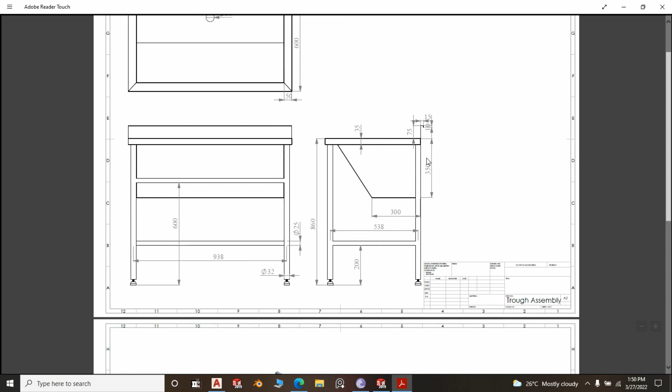You can even go ahead and use it in your fabrication, though it might be a bit challenging because I didn't put the cutting size of the trough body, but I'm sure if you are quite experienced in fabrication, you can get your cutting sizes from this, right?

So the size of the trough sink is 1 meter by 600, 1 meter by 600, and as you can see, the upper bend, the bend from here, this side is 50 millimeter.

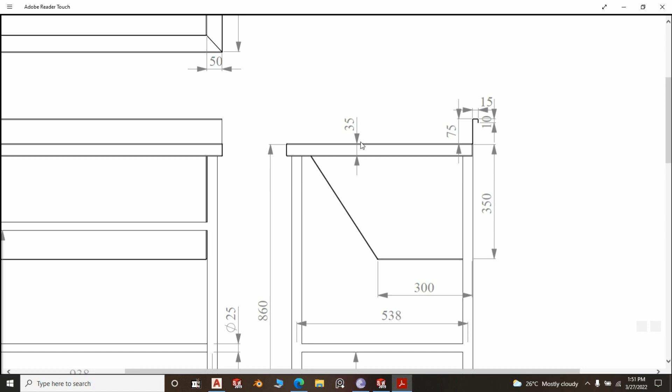Right behind here, can we zoom it slightly? It has an upstand of 75 millimeter, a bend going to the wall of 15 millimeter, and another one going down at 10 millimeter. The trough has a depth of 350 millimeter and 300 at the base, so that you may have it inclined. The reason why it is inclined, once again, is when you're standing and washing here, you don't splash water onto yourself and it goes straight to the drain.

The drain hole is dia 50, 2-inch, that depends on your plumbing. Now it has legs of dia 32, as you can see. Dia 32, this is a rubber adjustable grommet. This is a dia 25 bracing. This is the one at the back, as you can see here, and the other one at the front, and 2 on the sides. And there is a ground clearance between the bracing of 200 millimeter for the purposes of ease of cleaning the floor, right?

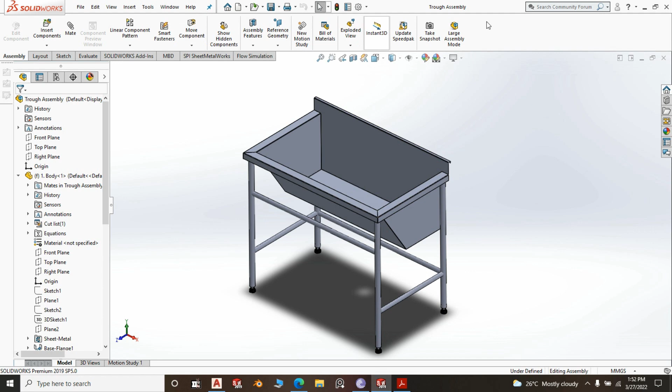So if we go to Solidworks and we can close this up, open a new drawing, go to, let me take this part, click OK.

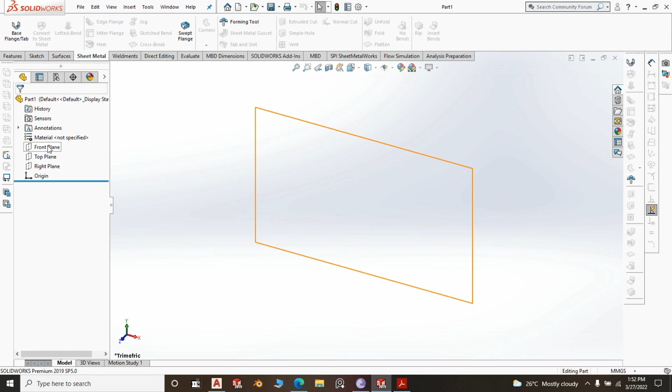And we go to top plane, create a new sketch, and in the new sketch, we go to center rectangle from the origin and dimension it. We give it the overall size of the trough, which is 1 meter by 600. Click OK and exit the sketch.

As it exits the sketch, you can rename this sketch. Instead of calling it sketch 1, you can call it outer boundary, right?

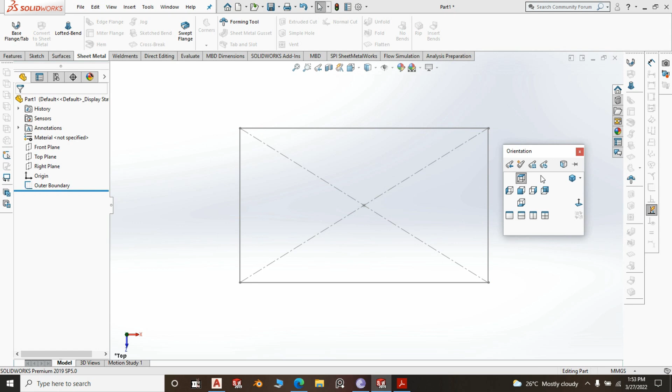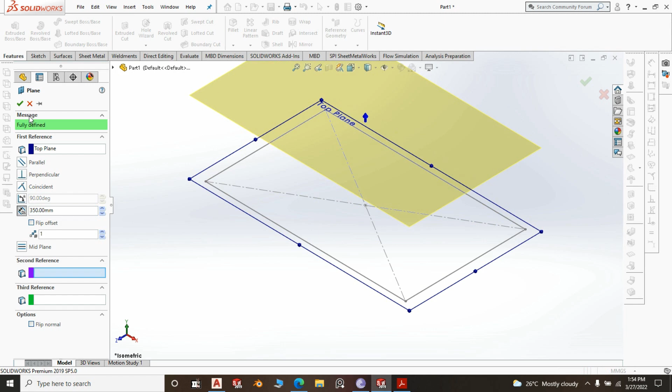Now feature, go to top plane, reference geometry, plane, offset it. You offset to whatever dimension, whatever distance you want. There is no harm in doing that, right? Any distance that you want is okay.

And from the new plane, sketch, new sketch, center rectangle. Let's first do it at normal. Don't center it at the origin. Click anywhere but the origin.

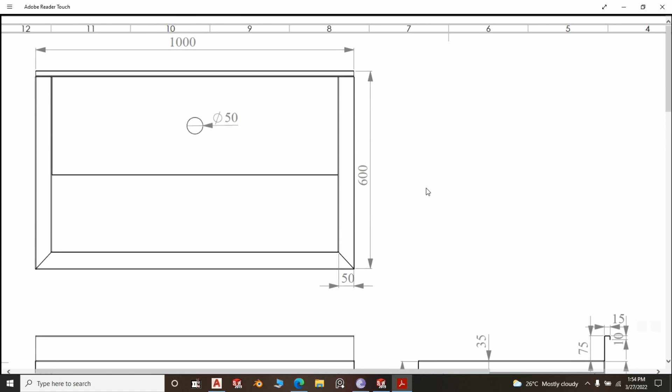And as you saw, there is a bend of 50 millimeter. The difference between the overall size and the inner boundary is 50 at the front, 50 at the side, 50 at the sides, and 50 at the front, and 15, this 15 from behind there, right?

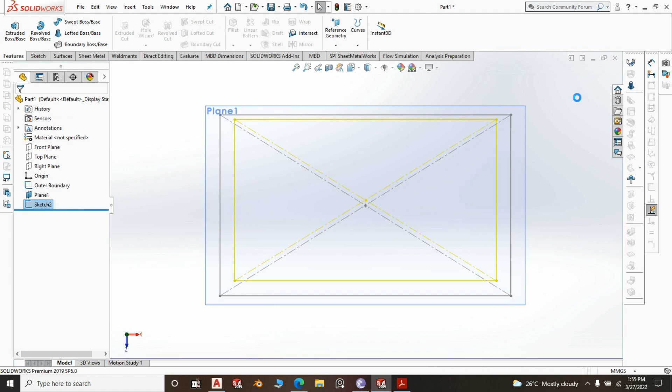So dimension from this to this, 50 millimeter, this to this is equal to this, to this equal to this. It's pretty okay. This and this is 15. That's it. Yeah, exit the sketch.

You can hide this plane. You can rename the sketch to inner boundary, right.

Now, once that is done, what we should be doing right now is coming up with this, the profile of the body. The profile of the body. How are we going to do that? Only one way to find out.

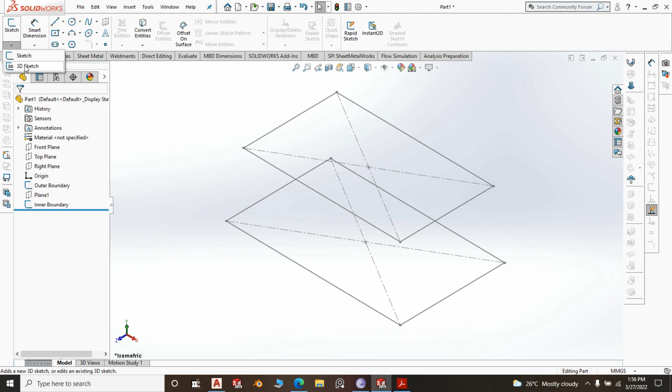3D sketch. You go for 3D sketch. Then a line from the center of the inner boundary sketch. Take it down. Hit tab. Then again to the front of the inner boundary. See, there it is.

So what we can do right now is to dimension the sketch. This is 350 and this is 300.

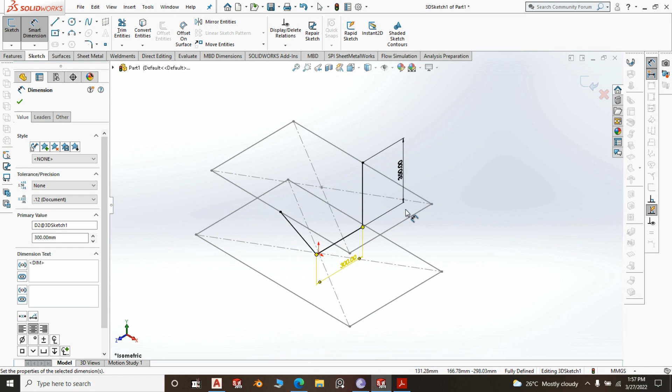This shouldn't be fixed, right? I hope I'm making sense. You can do a trough of 300 by 250, or 350 by 200, depending on what you prefer. There is no harm in having this shallow or slightly deep, and it also depends on the kind of goods you're going to be receiving at the receiving area. So there is no harm at all.

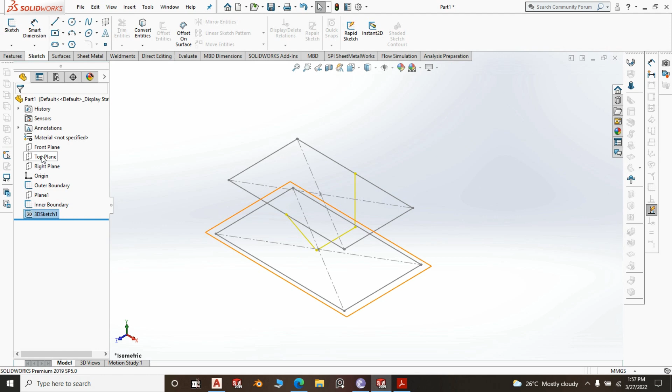Now you exit the sketch and go to plane. Which plane? Right plane, yes, right plane, feature, reference plane. You take it to this point, that point. And while you are at that plane, you create a new sketch, and convert entities, convert the 3D sketch.

Okay, now your sketch goes to the edge of the inner boundary. At that point, you go to sheet metal and create base flange. Direction on the opposite direction, and the distance up to vertex. You take it up to that point. Click OK. No, there's something that we didn't do here.

Let me go to this. I edit, you have to give sheet metal parameters. You give it the thickness of the metal that you're going to be using. It's supposed to be 1.5 millimeter. 1.5 millimeter will give you a very nice job when you're doing your welding.

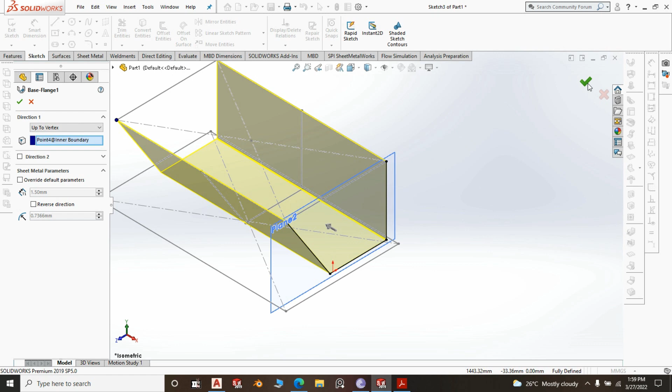Oh, this will be welding. So 1.5 is ideal for this trough. Okay, some people use 1.2, others use 1 millimeter, but when you are doing your welding all the way from here up to here, and you're using 1 millimeter thick sheet, it will wobble, it will deform, definitely. And since you will be welding on the outside — all right, I'm getting ahead of myself, we are going to talk about that later once we do the sides. So hide this plane.

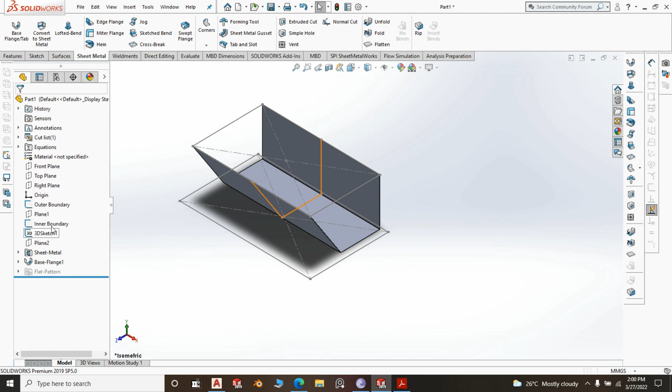We can go ahead and hide the inner sketch. Really? Yes, we can go ahead and hide the inner sketch, and also we hide the 3D sketch. The 3D sketch, we hide it, make it invisible.

So now what you need to do before you do many things is create this upstand. Then you go ahead and do the bending. You do the edges, the sides, and the bending.

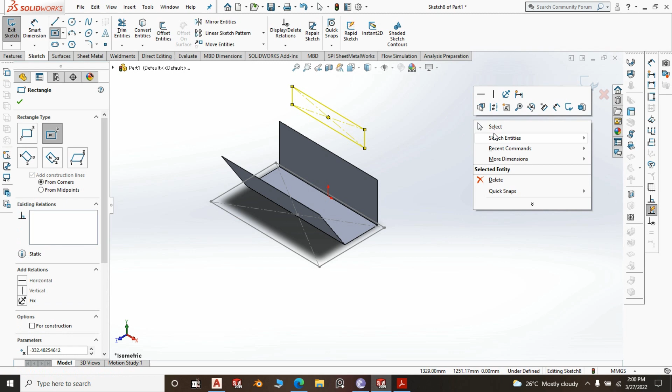So here I create a tab on this face, then I go to — should I go for center rectangle? Should I center it? Yep, there you go. Select OK.

This and this edge, you make them collinear. This and this outer boundary, we make them what? Make them coincident. Same applies to the other side. Make them coincident. All right.

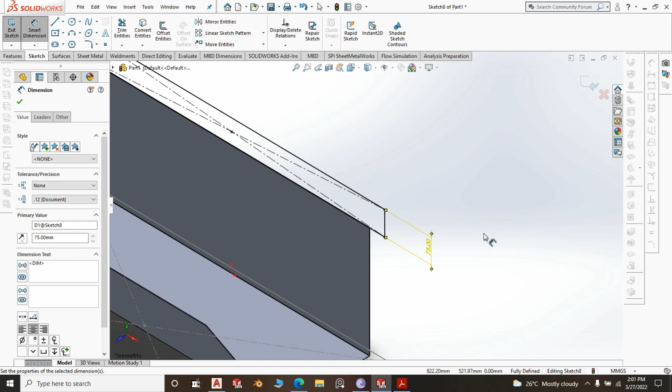Now, when you look at your sketch, it is seated pretty. Now we give dimension of the height of the upstand, 75. Again, this you can do 100 if you want, or 50, whatever makes you happy. I chose 75, no particular reason actually.

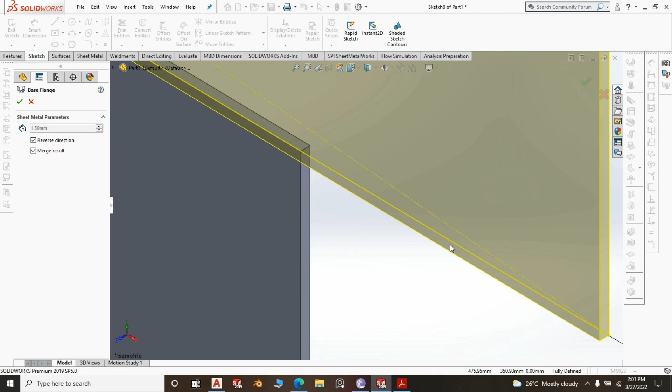When you click, you exit the sketch, merge, you make sure you merge it, and of course you don't want to take it on the reverse direction. In fact, the tab will refuse — see how it is going? So you don't want it going on the outside, on the reverse direction, right? So you click OK. There you go.

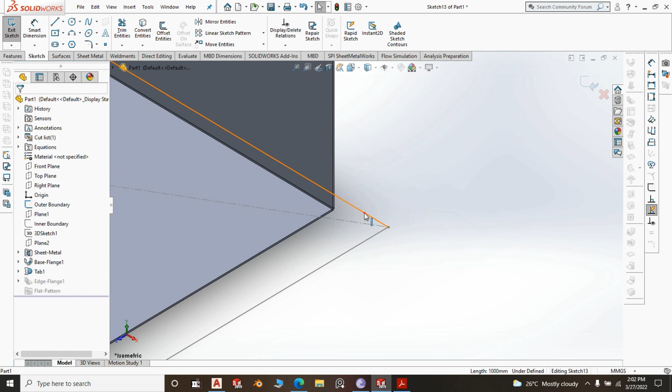You have your upstand. So if you want, you can go ahead and create edge flange from the rear, that 15 millimeter bend. You click OK, click edit the sketch, that line and this line, and make them collinear. So that one will be accurately 15 millimeter.

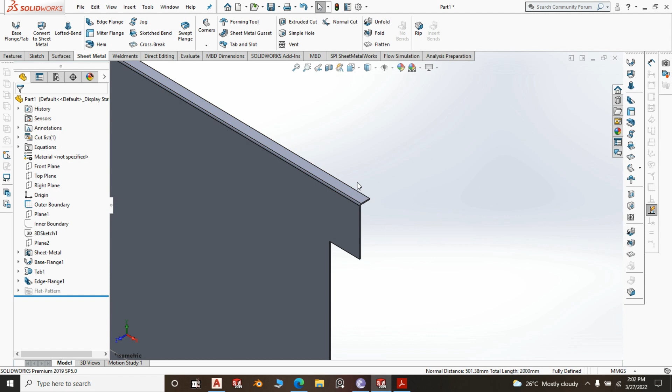You don't have to keep typing there, because of the bending allowance — if you do it 15 millimeter and you get the flat pattern, it will definitely be bigger than 15, and you will lose your dimensions. So create another edge flange from behind this. You can type, no worry, typing this 10 millimeter, because actually it will be hidden on the wall. So whether it becomes 10, slightly bigger or slightly less, there is no harm, right?

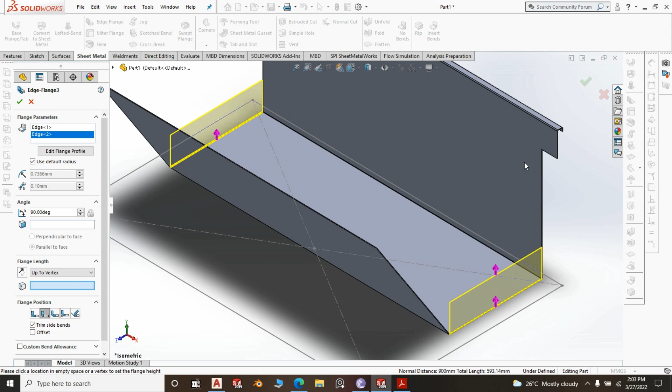Now you go to edge flange, create edge flange on this side and this other side, and blind up to vertex. Where is the vertex? The vertex is here. Click OK.

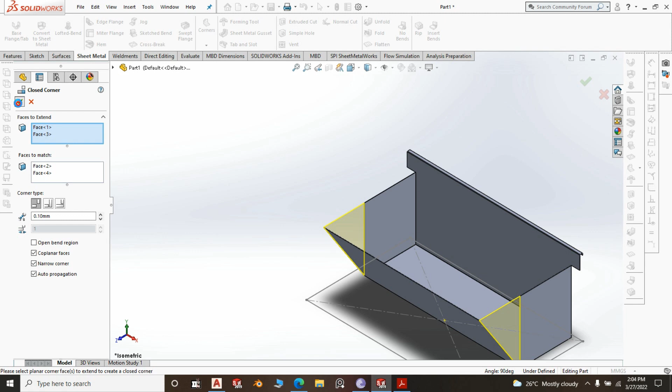Right, our trough is really taking shape. Then you go to closed corner. You choose this corner, keep the gap as minimal as possible because we're going to talk about that in a few. This side matches with this corner, and this face with this other one. Click OK, and you're done, right?

So when you click, your flat pattern button is coming, which is pretty much okay. Now create edge flange, another edge flange.

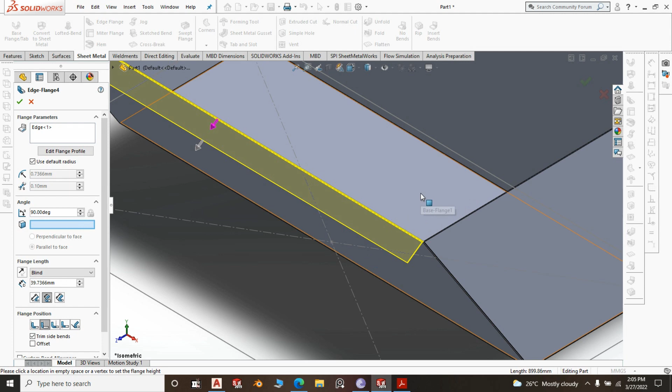The beauty with fabrication and doing these drawings, it's very easy, it's not a tedious thing. Make sure the face is parallel. You see this because it's inclined, and if you do it at a 90 degree, it will also be inclined. So you do it parallel to face. Parallel to which face? Parallel to that face. The surface becomes flat, right?

Don't do blind, but if you do a blind it's okay. You can do your blind, then click on the bend, edit sketch, make this line and the line on the overall dimension, the outer boundary, collinear, and that becomes 50 mil. Exit the sketch.

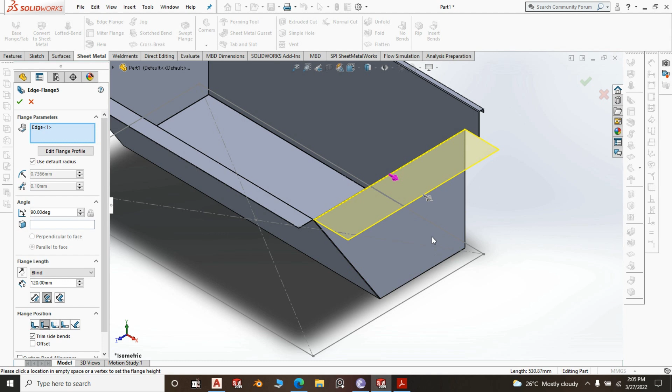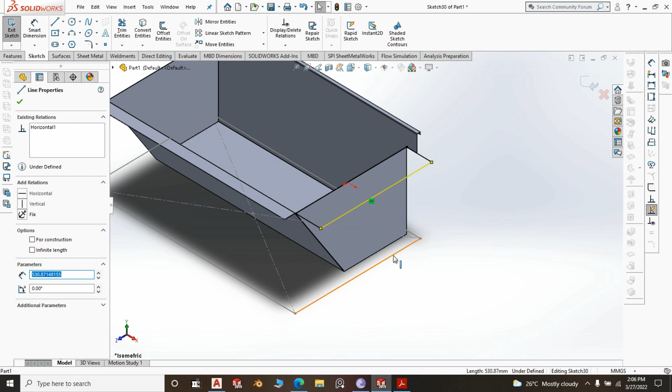Now on the other side also, do edge flange. That is 90 degree, because this is 90. There is no harm in doing it at 90. You don't need to make it parallel, you don't need to change anything there. Click OK. Then, as we did with the other, edit sketch, make this line collinear with this line, and the same thing will happen on the other bend, and you're good to go.

If you want, you can still do it up to the vertex, which will come. You choose the vertex to be that point. Now the purpose of this sketch, the outer boundary sketch, is done.

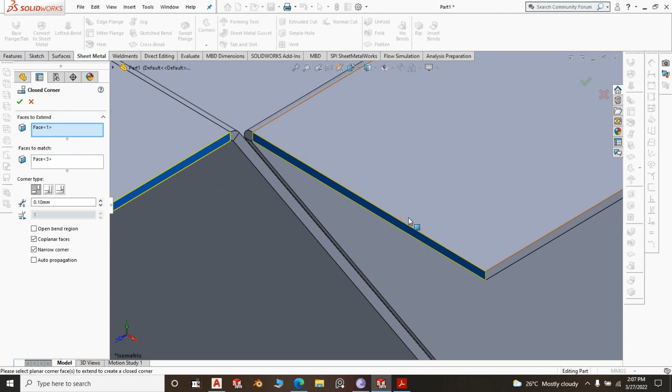You can hide it. Go ahead and do closed corner, same parameters, no change there. So this corner, you are going to have some trouble with... yeah, that should work. That's okay, right? And our closed corner is okay.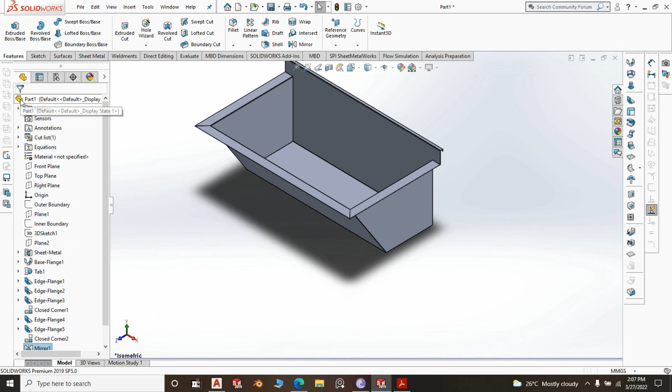Go ahead and use the right plane, mirror, where we feature mirror. What do you want to mirror? You want to mirror this closed corner about that plane. If you want, you can go ahead and do another closed corner here, but there are so many tricks on how to do this.

Go back to sheet metal, edge flange. This is an edge flange here, that side, and this side, and here we saw it is 35 mil, blind of 35 millimeter. Right click. Okay, now finally we have our edge flange here.

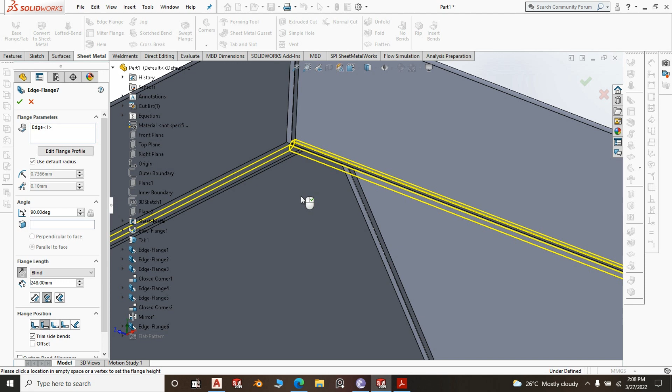And here, and that bend should be 15 millimeter. You can even do 10 if you want, but 15 is always ideal. And our trough body is done.

You can go ahead and save it in your folder. What is the name of our folder? Sorry, tutorial GR2, part number. We do GR2, sorry, 2, and say body, trough body, trough body, trough body. I told you there is a reason why I'm saving my items as per the layout.

Because I intend, once we are done designing all the items, to try to make an assembly of the components. We do a layout of the 3D components and see, as we learn, what it will look like, right?

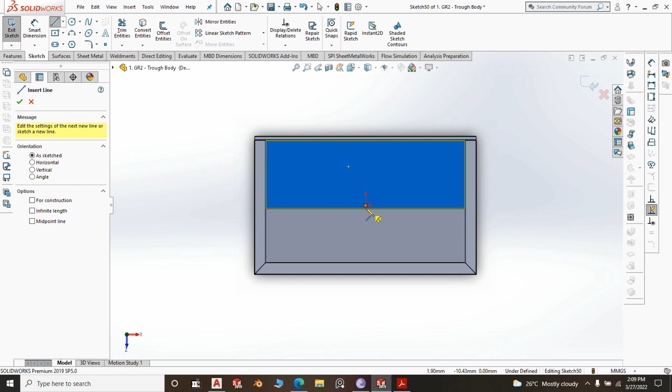So the only thing remaining here is to do a sketch at the bottom so that we may create the drainage hole. Yeah, normal. Our hole should be at the middle of that and that. We are passing through the origin, so actually it should be a construction line.

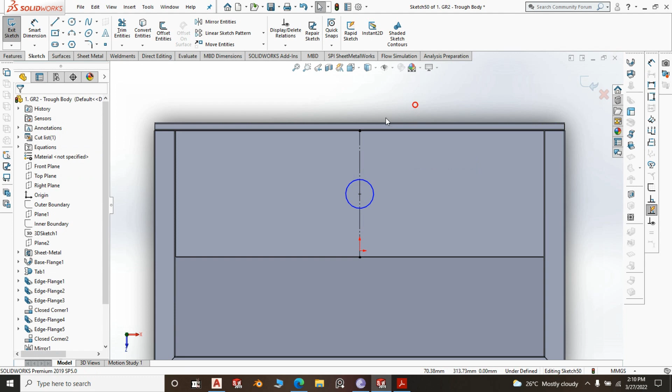Then we do a hole: choose this and this line and make it coincident, make it midpoint, right? Then we give it a diameter of 50 millimeter. That will be okay.

When we go to feature, extrude cut, link to thickness, your hole is done.

Now I should mention something really quickly at this point. The design of this trough, the tap - you can have two taps, so two people can operate, but 1 meter is ideal for one person, so one tap is pretty much okay. If you are expecting to receive a lot of goods, you can make it a little longer, say 1500 millimeters, so you may have two taps, so two people will be washing the goods.

But this is 1 meter, ideal for one person, it's a small kitchen, as I was telling you. Now if you look at the design, especially here at the back, I don't have a bend going this side, then the upstand, then the back bend, right? Because the reason you should have a flat surface here at the back similar to this one is if your tap is coming under the sink. But now our tap will be coming right from the wall, slightly above the backsplash.

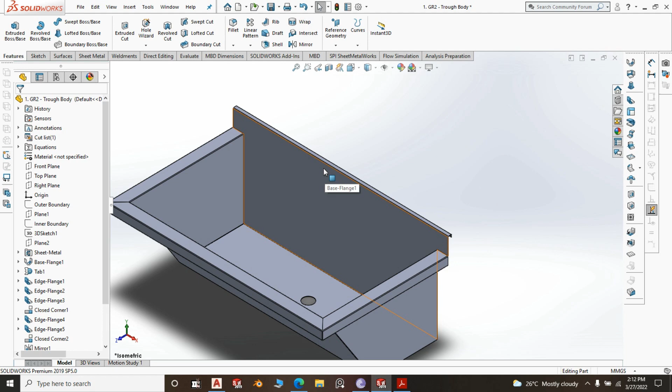That is why the upstand and the back side of the trough are one continuous piece, because we don't need to put provision for the tap, and we don't even have to have the hole provision for the tap on the back side of the trough. It will be right on the wall from the tiles.

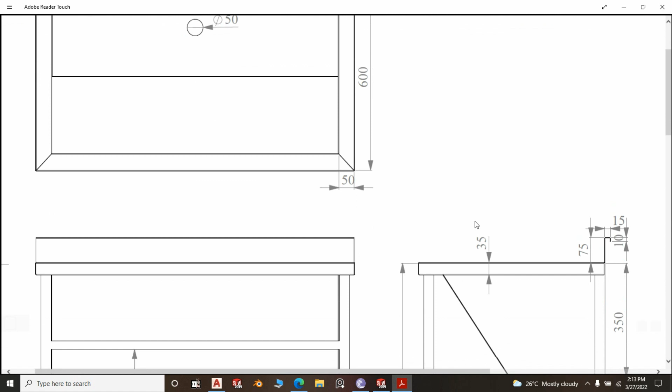Use the plumbers fix their tap and you got water, right? Now another thing is, you can have this tap, this trough, wall mounted with mounting brackets on the sides, or standing with legs. Ours is freestanding, so it has legs, so we are going to go ahead and create the legs and the bracings and all that. So this we have saved.

If you feel like changing the material, the appearance and all that, it's metal, polished steel. Steel, and it is polished steel, brushed steel, satin finish, mirror, matte, brushed steel, this one, polished steel, brushed steel. There you go. Oh, we might later on change the appearance when we'll be doing the layout, right?

The layout. Why am I calling it the layout? That is not English, man. The layout. I can give you a sneak preview of what we will be doing in 1 second.

Where is it? Where did I save it? Projects, Solidworks tutorials, tutorial layout, items, placed. Well, there was something that I had done. Close. I will work on it.

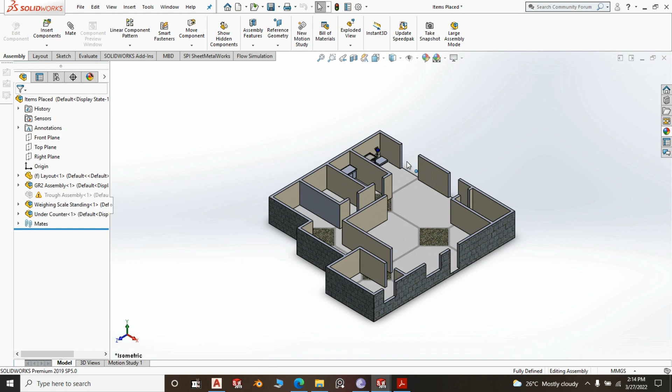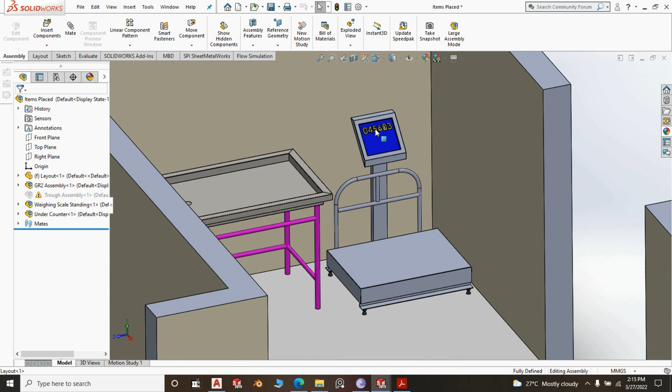So our first item was GR1. Here we have freestanding digital weighing scale. Then we have the one that we designed the other day, the goods receiving table. Now the trough will be sitting here, and as I was saying, the tap will be coming right from the wall. I didn't give a tutorial of the weighing scale because I just did a representation of a weighing scale, because this is just a solid, and ideally this part should be moving, right? Also, the numbers, the screen, the display screen, so many things are not there.

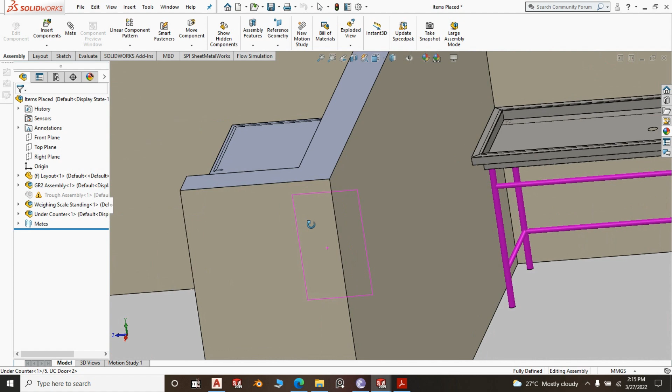It's just for a representation. Also, here we have our under-counter fridge. Well, maybe we might want to take a look at the design of the same, but we will see. So ideally, this is the layout.

I did the layout. I'm not a structural engineer, so I did the best I could. Goods receiving, dry storage, cold room, pastry area. This is the pot wash area. Here we have the dishwash area.

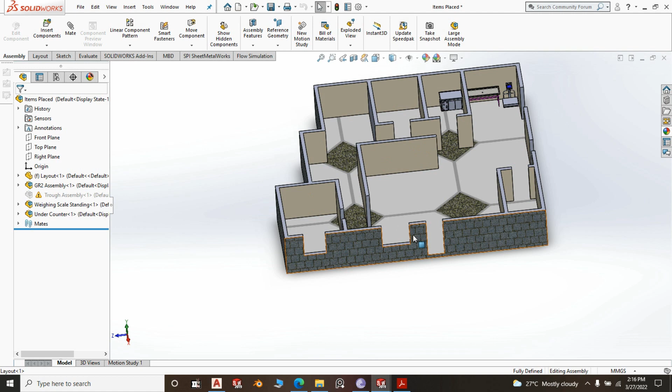Here we have support kitchen, the prep area. The chef's office is here. The hot kitchen will be somewhere here. This is the entrance, the door to the sitting area. This is the serving area, will be somewhere here. This is the serving arch, and this is the kitchen. Opening for the dirty utensils, taking them to the wash up area, right?

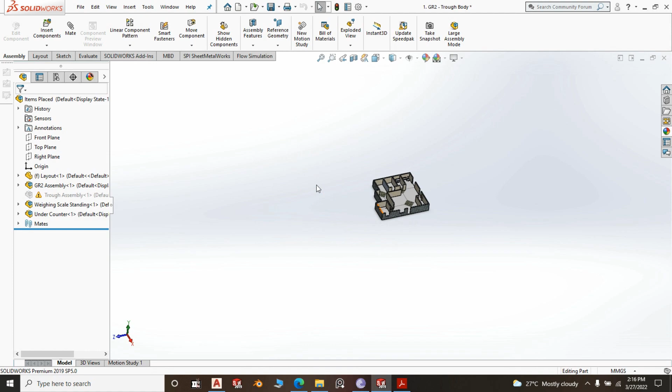But we will talk about that when the right time comes. And also, we did the layout itself, through AutoCAD. This is the same thing that we are talking about. You might want to check the video.

We will try to fill all these items. We'll design one by one, then fill them in that Solidworks 3D. We will also do it in SketchUp. We will also do the layout in Blender. We have so much work and a lot of things to learn, right?

So let us continue with our Trough Sink. So this is part 1. We go ahead and save. Then we go to File, New Part, Part 2. Click OK.

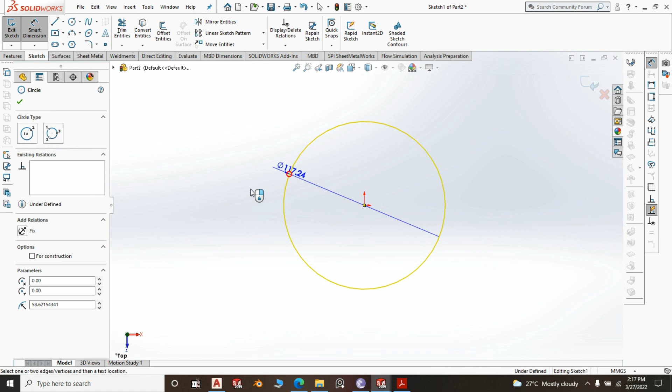Top plane. This is quite easy. It's just a new sketch. We do a circular hollow section, that is a leg. Then remember we said our legs will be dia 30, dia 32. Dia 32 is ideal for that. Offset it, and the thickness of the

leg is 1.2. The reverse direction. Sorry, what did I just do? Delete this and offset again. 1.2 in the reverse direction, right?

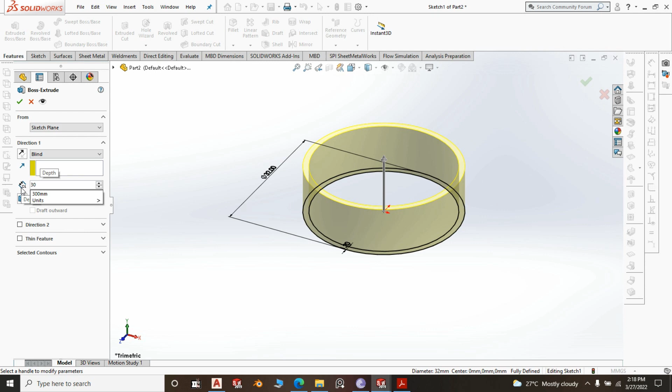That's pretty much okay. Feature, extrude, and push. How do we want to extrude it? Mid plane, or that's still okay. Direction 1, blind at 860, 830, because ideally the total height of the trough should be 860. So if we are at the grommet, 860, adjustable up to 860, somewhere around there. So our leg is done.

Go ahead and save it as 2, GR2, CHS legs. Why we are doing circular, safety purposes, safety and cleaning around is always easy, other than a square hollow section. A square hollow section, that... and it is also economical, right?

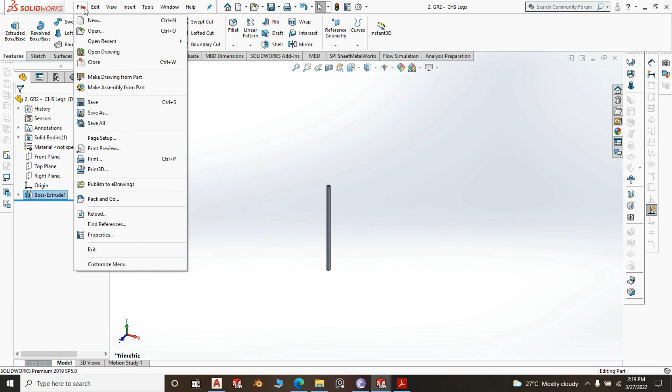Now before we do this other part, let me cancel it. Before we do the brace part, we will do the assembly so that we may use our tool to get the dimension between one leg to the other and to get the right bracing. All right, so we go ahead and do our new part, assembly, click OK, and our base part is trough body. Insert component again. That is our leg mate.

The top part should be lying on that part. Coincident relationship. Click OK. Then this tangent to this bend, the 15mm bend, where are we taking it?

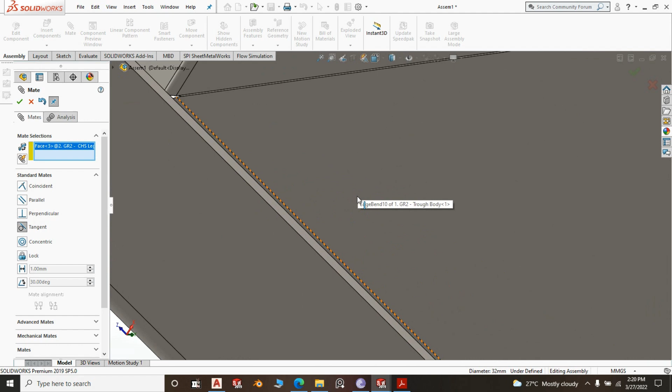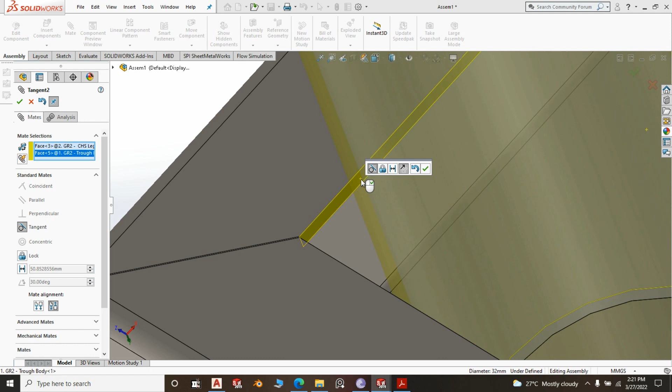That bend, where is it? Direction 2. Yeah, direction 2, click OK. Again, tangent relationship. That one to this direction. Direction is okay, right? Click OK.

Our leg is done. Now, if you take a look quickly here, our welding will be right here on this, the 15mm bend. That is where we'll do our welding. Remember, I normally keep saying that you can't do your welding here. It will penetrate on the top.

And again, if I may mention this real quick, the trough, remember this part when you're doing the cutting size and the bending. This part and this part will come in a separate part. So we will have a weld here, a weld here, weld running all through up to this side.

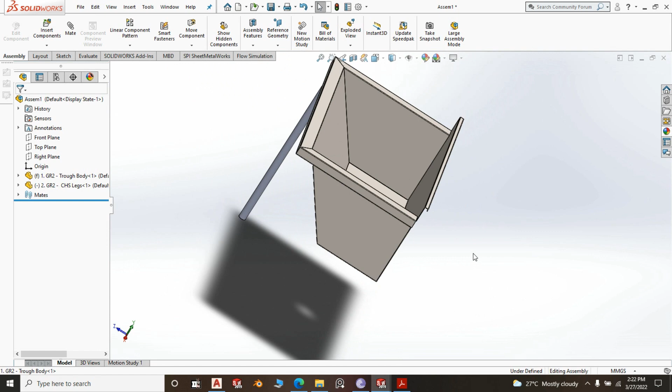Make sure that the gap is very minimal here, because you will be welding from the outside. Here you will be welding from the outside, and you don't want the weld to penetrate inside, because there is no way how you can polish here, no way you can polish from the inside. So what you're gonna do after welding is just clean it with a pickling paste.

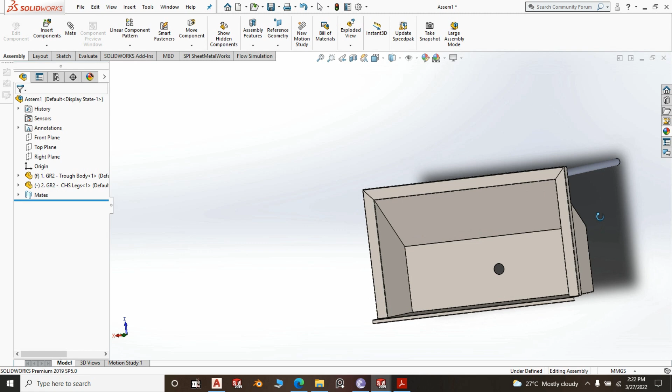So we are creating products which are neat and smart for our clients. We don't want to do something which looks... whatever that one is. The only place that you will be having visible polishing marks is right here on the top and the front, and that's it. So your leg, make sure you weld it on the 15mm bend, right?

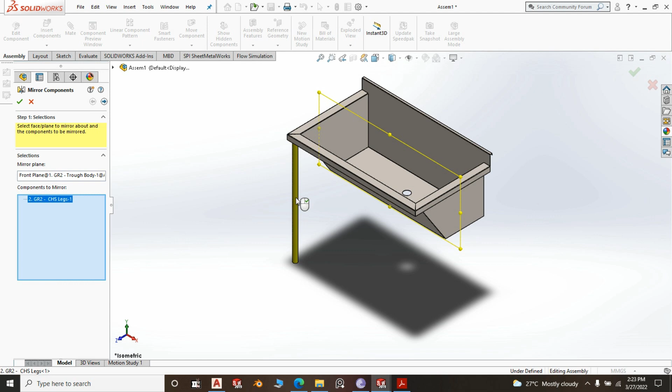So we open the top, the trough body, and you go to the front plane, components to be mirrored. There's the leg, and yeah, it is pretty much okay. Till that, you go to the right plane, mirror components, to mirror these two legs.

There you go. So now we want to design the long bracing and the short bracing. Evaluate tape measure. Boy oh boy, the distance between the cylinders is 538. Remember, 538.

So you can go ahead and create a new file, new part. Front plane, new sketch, circle, center circle from the origin, dia 25. Remember, our bracing is of dia 25. Select, then offset 1.2. The thickness is 1.2 on the reverse direction. Click OK. Feature, extrude. How do we want to extrude?

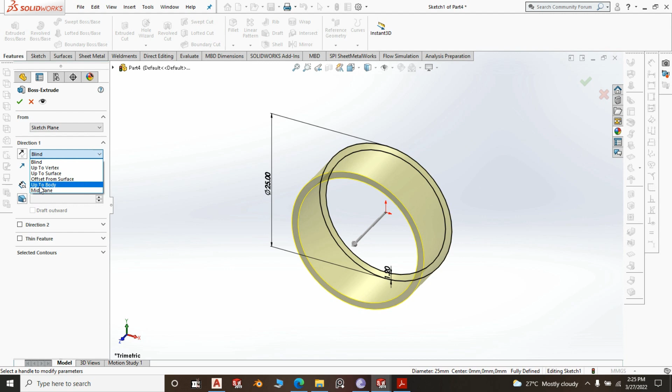Mid plane. Yeah, mid plane. 538. Beautiful. And go ahead and save as part number 3, GR2, CHS, short bracing.

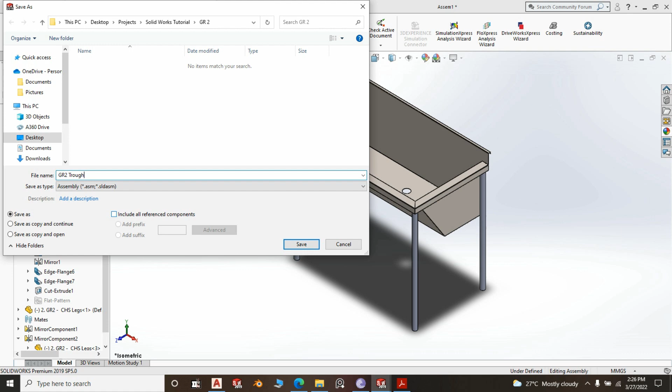Right, now we go back to our assembly. We didn't save this assembly. Can go ahead and save it as GR2 Trough Sink. Sorry, Trough Sink. Okay. Now, measure again.

We measure the distance between the cylinders. Distance between the cylinders is 938. So the long bracing. Go to file, new part. Okay.

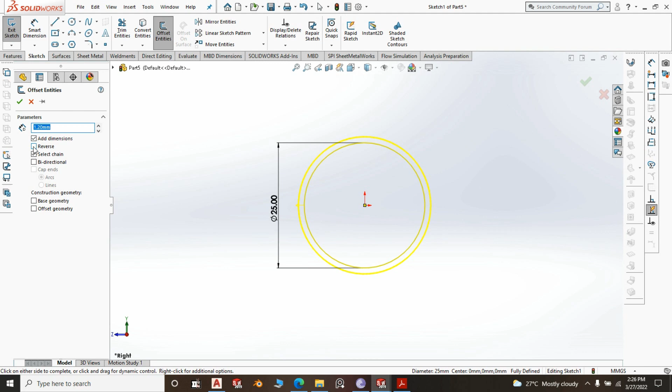Right plane, new sketch, circle, center circle, dia 25. Click OK. Offset 1.2. Reverse. Click OK. Feature, extrude boss, mid plane.

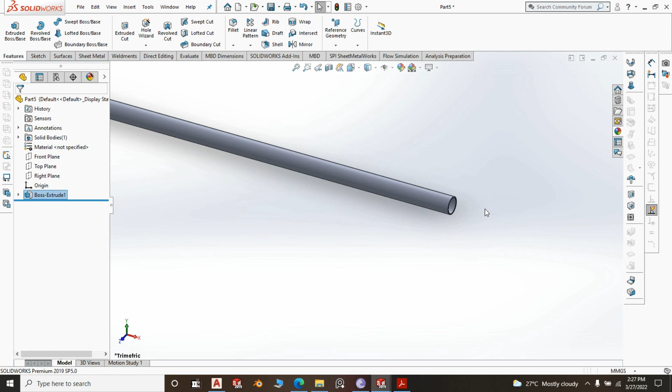938. Now, the 938 and 538, if you have seen quite correctly, because you have to notch it, you can't put this side directly and weld it on another cylinder. You have to notch it so that it may take the profile of the leg, the dia 38 leg. That is why, if you take a look, let's talk about that once we assemble, we put them into the assembly.

So let's save this as part number 4. Is it? Yeah, part number 4. We can take this and edit instead of writing everything, just long bracing. There we go.

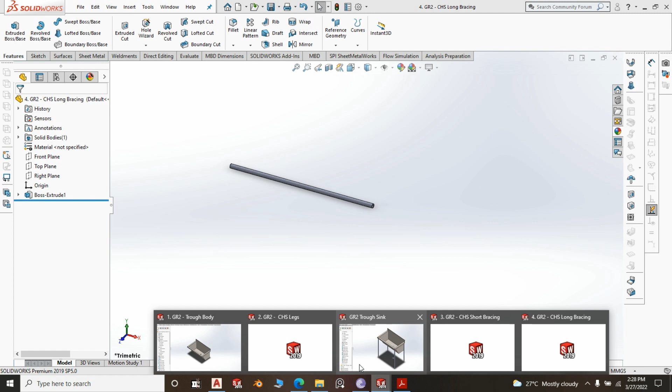Now we go back to our assembly and bring in assembly insert. We take short bracing and long bracing, 1, 2. Now we can mate, you can go ahead and mate which one? Where's the leg? Yeah, this is the leg. The right plane of the leg and the right plane of the short bracing, right?

The right plane of the short bracing. There we go, that's pretty much okay. Then we go ahead and take which one? Not top, front plane of the bracing and front plane of the long, no, front plane of what? Of, let's see, yeah, front plane of the trough body.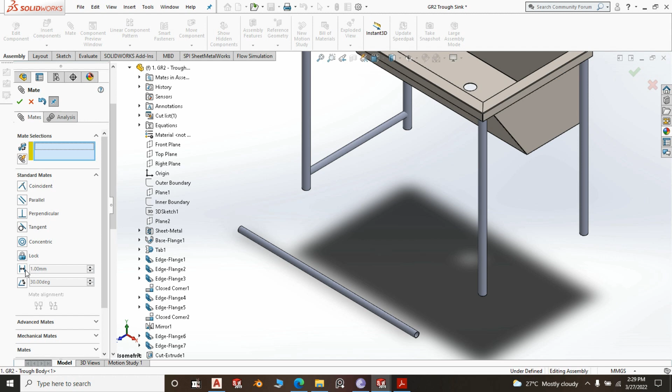Exactly, that is okay. Then we go ahead and take distance of this and this part. The base should be 200 millimeter. Yeah, remember the clearance.

Now we go ahead and take, what are we looking for? Oh, the long bracing. It is, yeah, we can take the right plane and the right plane of the body of the trough. Okay, that is okay. Then we take the leg. See, it is leg. I want mirrored components.

Yes, mirrored component. Yeah. What's going on?

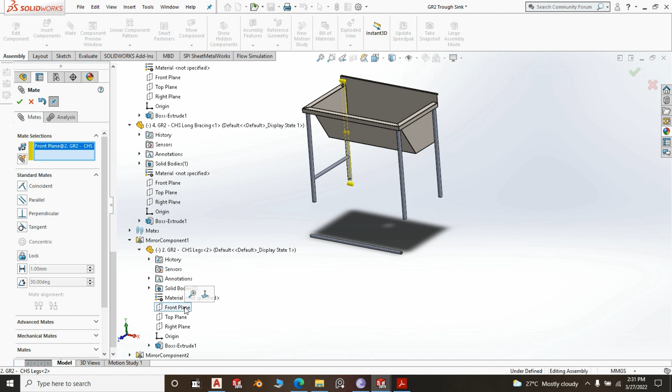Okay, we take the front plane of the mirrored component and front plane of the long bracing. That's okay, click OK. Then we take the top plane of the long bracing and the top plane of the short bracing. That's pretty much okay, that assembly is good.

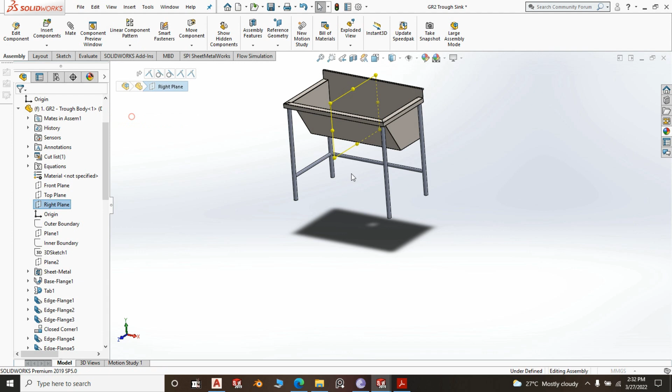Now you go ahead and take the right plane and mirror component to mirror is this bracing. Cool, so that's about that.

This is what I was talking about. If you can see my assembly, the short bracing is going almost up to the center of the leg, right? So you're not going to do a hole on the leg, that will be weakening it. But the short bracing and the long bracing, you will notch it to take this profile so that you may do your welding right here.

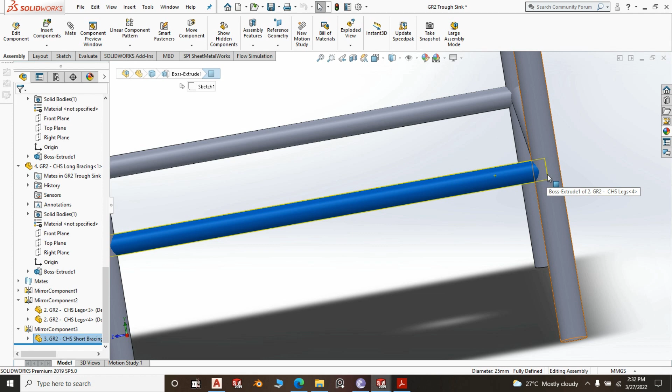Can we make this change transparency? Now the part that has gone inside the leg should be outside. So when you notch your bracing, it will be on the outside, so your welding will be running. Let me go to this one - your welding will be running right through here on the outside. I hope you get what I'm saying, get my point, alright?

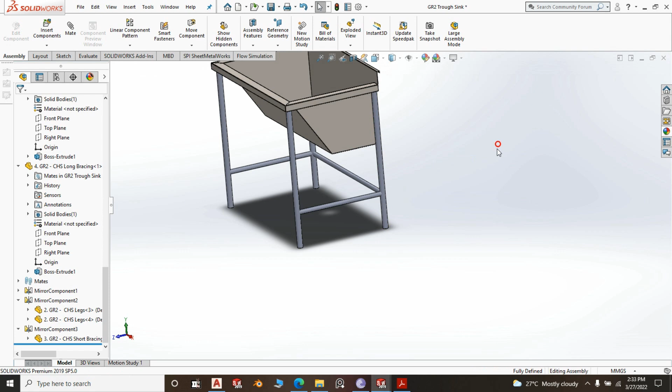Transparency. Yeah, so we insert component again, and this time mount is long bracing. Okay, mate. We can't mirror this because it will come at this level and we want it at a different level. It would start giving me all sorts of issues with editing relationships, I don't want to do that.

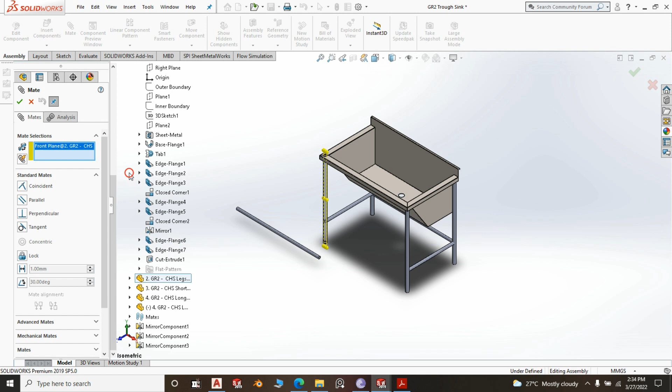So why don't I just bring in another bracing and go for the top, the front of the leg, and the new bracing that we've just brought in. Where is it? Where is that bracing? Mirrored component, we don't need you. Let us collapse all these things. Is it this one? Yeah.

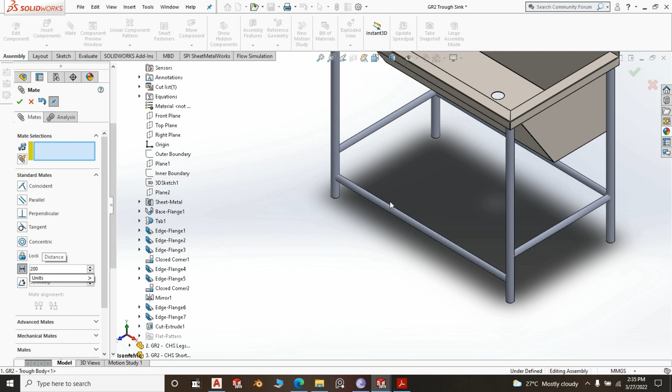Thank you. Then we take that right plane and right plane of the trough. That is okay. And we go to distance 200 between this and this, the bottom part of the bend of the front. That's okay. Yeah, that bracing is pretty much okay. So our trough assembly is ready.

Now, why we put this here? Obviously, when somebody is doing their cleaning, their washing, they are standing and their legs are going almost under the trough. Don't want this disturbing. When you put it at this level, it will disturb, it will be annoying to the person doing the washing. Again, also for storage purposes, you can be putting your crates right under here, you never know, you might need this space.

In fact, other people, instead of doing the bracing, they put a slatted shelf under here where they can be storing a few items here and there. It might be a very good idea also to have it slatted. Once you wash your items, your goods, put them under here, they drip all the water, because when you are taking them for storage, you don't want them going to storage with water.

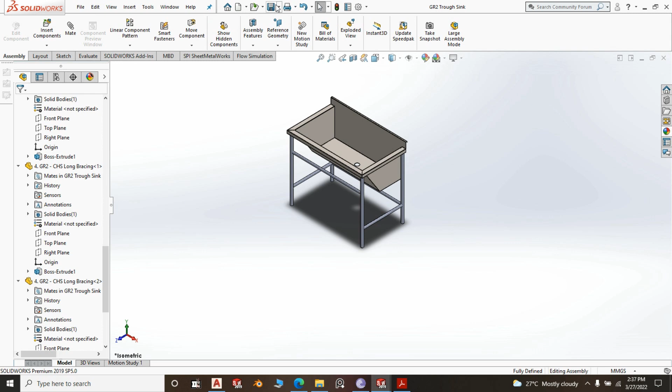Right, so grommet, I don't feel like designing grommet, you know the drill, that is an imported thing. You just buy it from the suppliers, come insert it into the legs. But I had drawn the grommet in my practice drawing before doing the - what do we call it - Solidworks Trough grommet assembly.

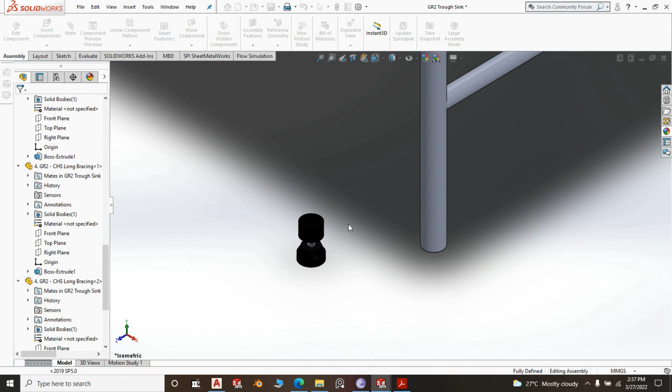Open. Here is my rubber grommet, take a look at it. So I made it concentric relationship, this and this concentric. Okay, I gotta pull it down. What's going on here? Concentric relationship between this and this. That's okay.

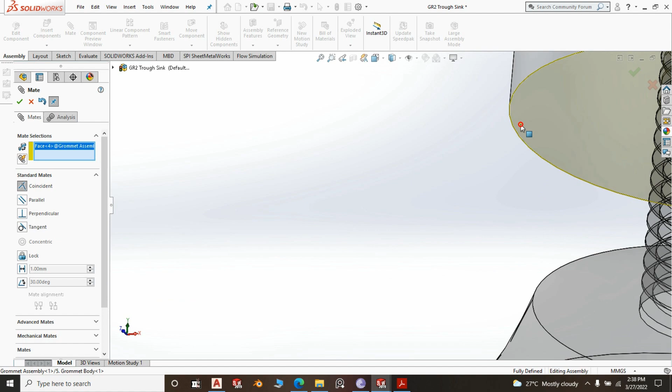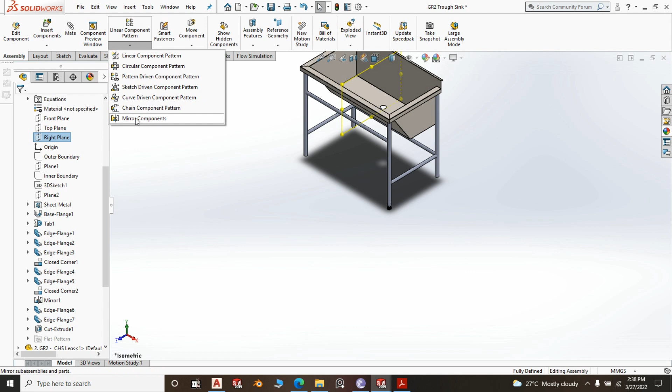Then can I pull a coincident relationship between this surface and this? That's okay, the mate is good. So if I could go to collapse this, also collapse this, also collapse this, collapse this. Yeah, I go to right plane, mirror component to mirror that one, click OK. Then we go to the front plane, mirror component to mirror is this and this, click OK. There we are, our Trough Sink is done.

Alright, it is done. I have a question for you people - have you ever dreamt taking a shower?